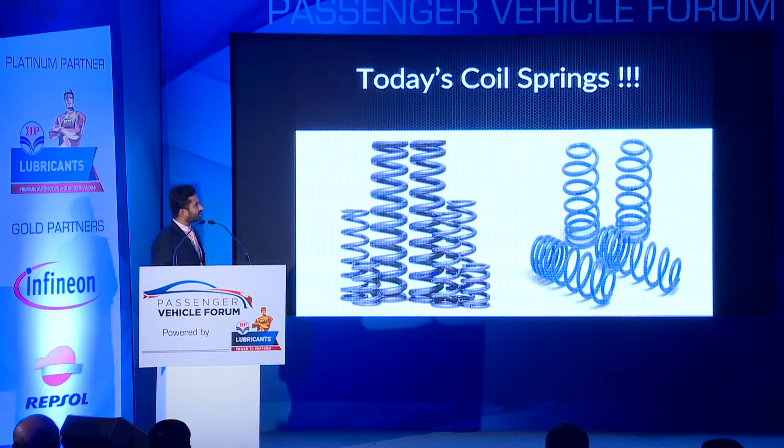Let's get some inspiration from BMW i3. Why exclusively BMW i3? This is the only model which is commercially available, and it has internal structure and body made with carbon fiber reinforced composite polymers. We should learn from this technology - how this material, CFRP and GFRP, can be used commercially for each and every vehicle, not only for electric vehicles, but for all passenger vehicles.

So these are today's suspension coil springs that are available in the industry and being used regularly with all the OEMs. These are made with steel. We have CFRP and GFRP springs as well. We have samples available here so that you can have a look and feel of this product.

The major benefit of using CFRP and GFRP springs is that it has a weight of only 1 kg on average compared to the normal steel spring coil that we use, which is approximately 5 to 7 kgs each. So if we are using CFRP, that is carbon fiber reinforced polymer composite, it has a weight of 0.88 kgs each spring compared to 7 kgs or 5 kgs of the steel spring. And if you are using GFRP, glass fiber reinforced polymer composite, for the same spring application, that is 1.1 kgs each. So we are getting a weight reduction of more than 74% in each spring.

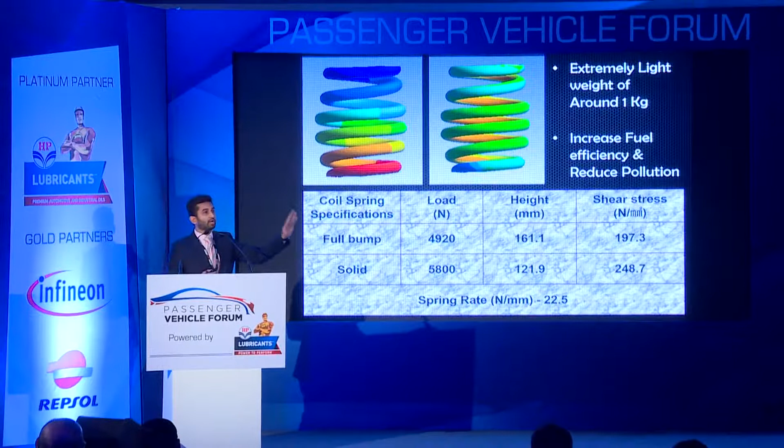These springs are being tested with the number of cycles compared to steel springs, and yes, it has performed 24% better than the steel springs. They have a full bump load of 4920 Newton at full bump, with a shear stress of 197.3 Newton per millimeter square.

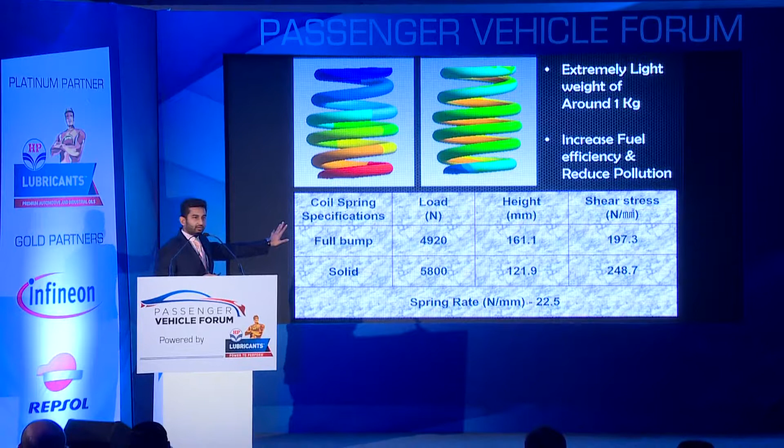I will not go into the technical details right now. This is the data which is available with us, and I can share more when we are offline. These are the different types of tests done on the springs: spring constant, creep test, fatigue cycle test, fatigue creep test, simulator, and weight measurement.

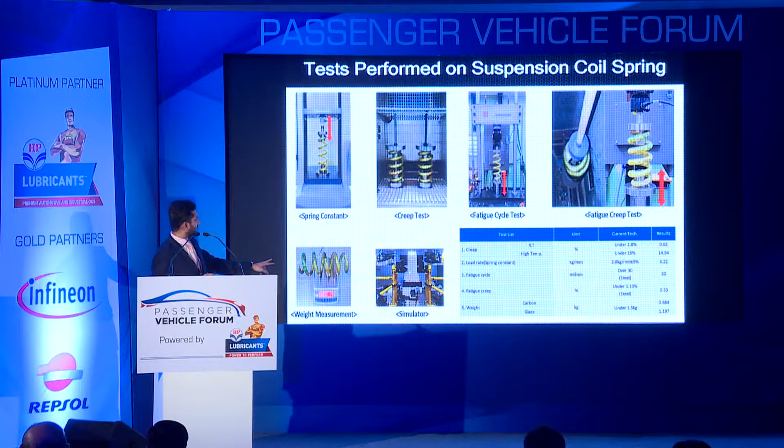We do not call it old technology now, but these leaf springs are also available in CFRP and GFRP.

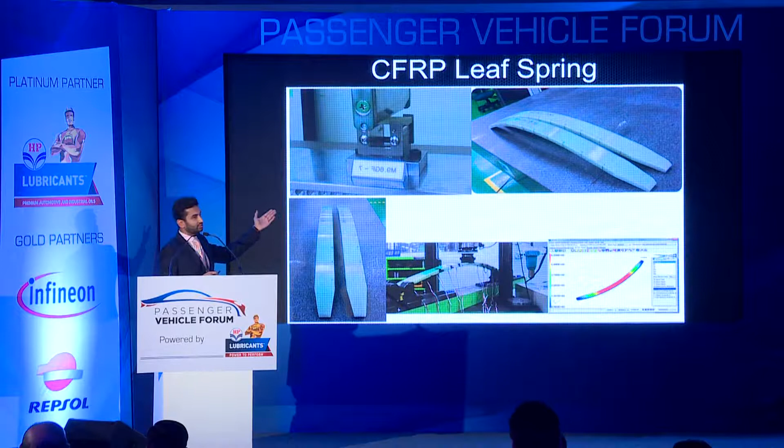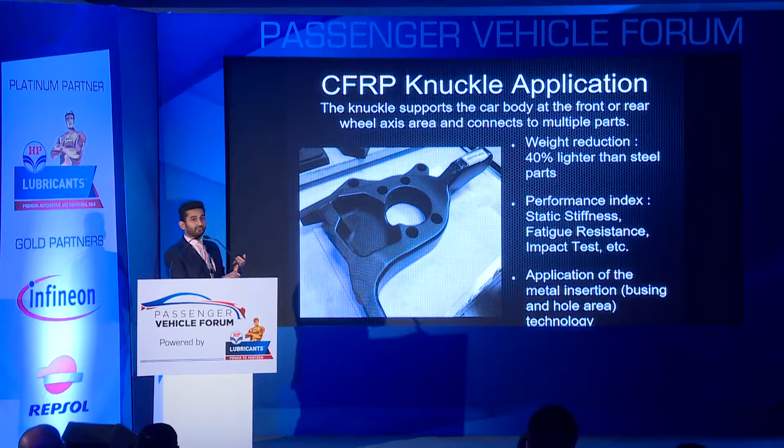Another application is the knuckle application. This supports the car body at the front or rear wheel axis and connects to multiple parts. This part also has a weight reduction of 40%, and the performance index includes static stiffness, fatigue resistance, and impact test.

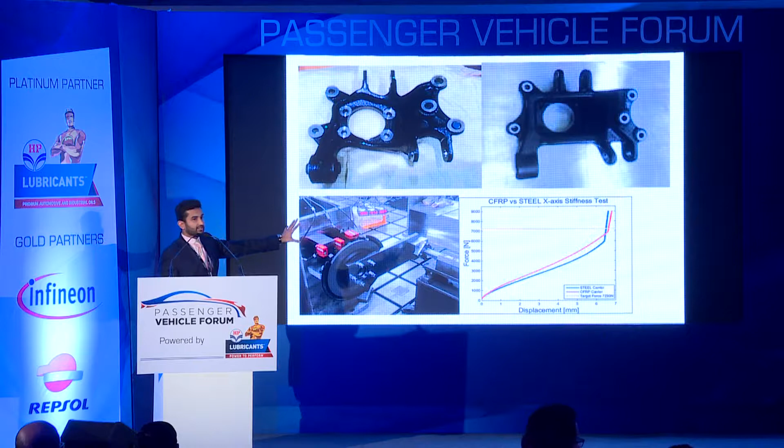Moving to this application, there is a comparison of CFRP versus steel. On the stiffness test, we can see the performance is almost equal, in fact better. These are some photographs of the same application, also known as carrier and knuckle.

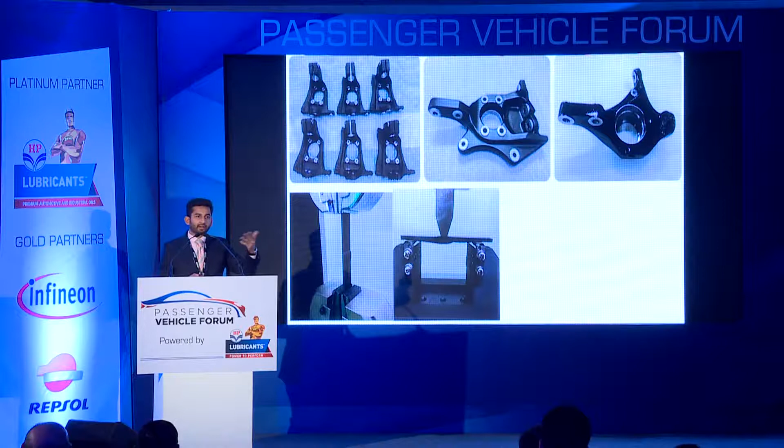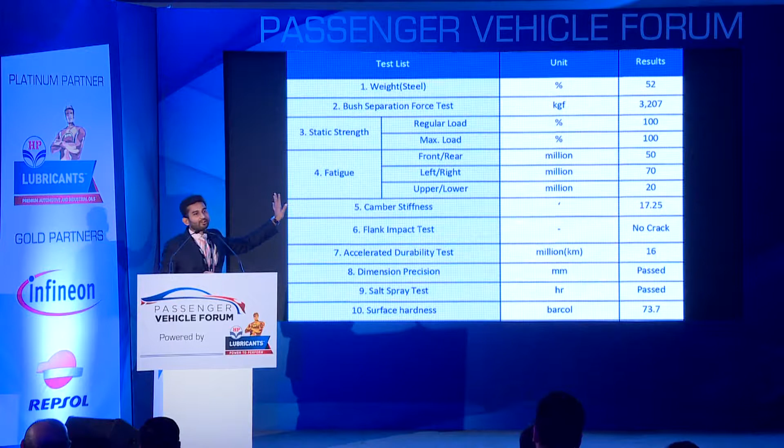So these are again the results that we have achieved. I don't want to go through each and every test and result, because I know we have passed all the tests compared to the steel application. So these are again the tests for that.

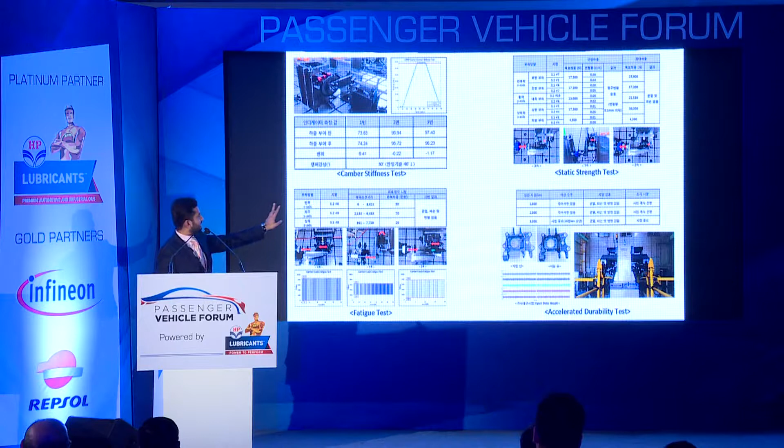That is camber stiffness test, static strength test, accelerated durability test, fatigue test. These are the tests mentioned here, but there are much more tests already done, and this product has passed those tests.

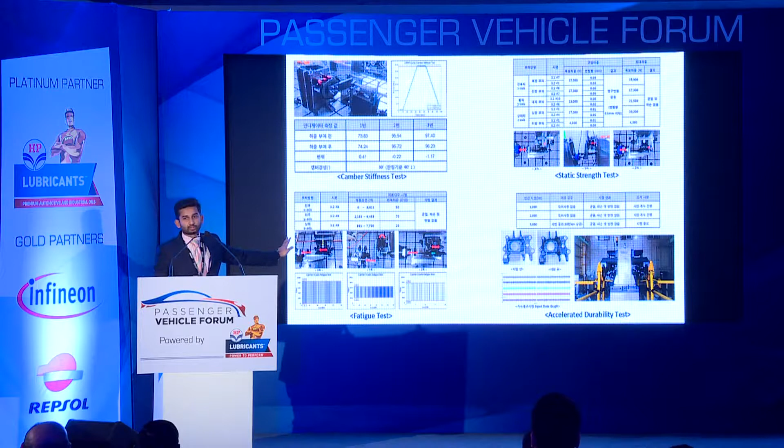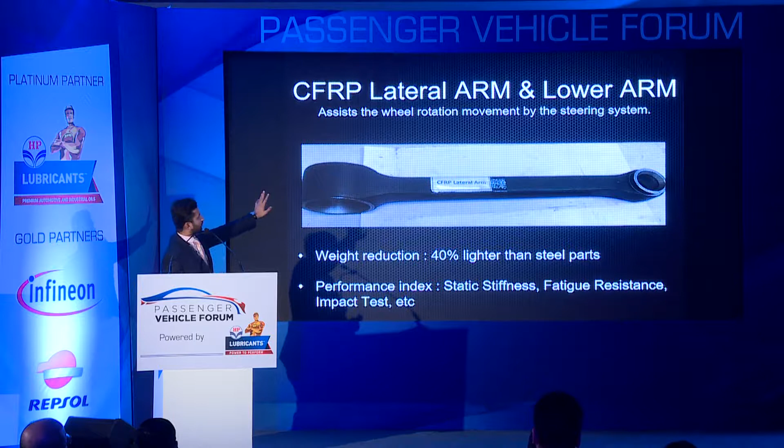This is another lateral arm and lower arm. We have both samples available here also. These are applications to assist the wheel rotation movement by the steering systems. I don't need to repeat the same advantage of weight reduction and better strength compared to steel application. These are again a few photographs of the application.

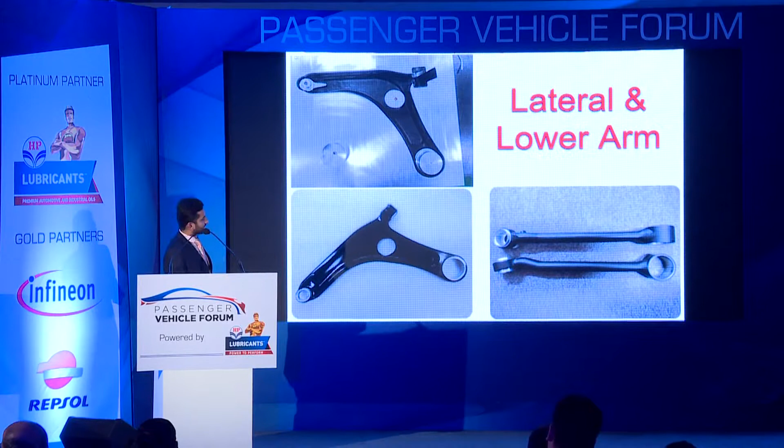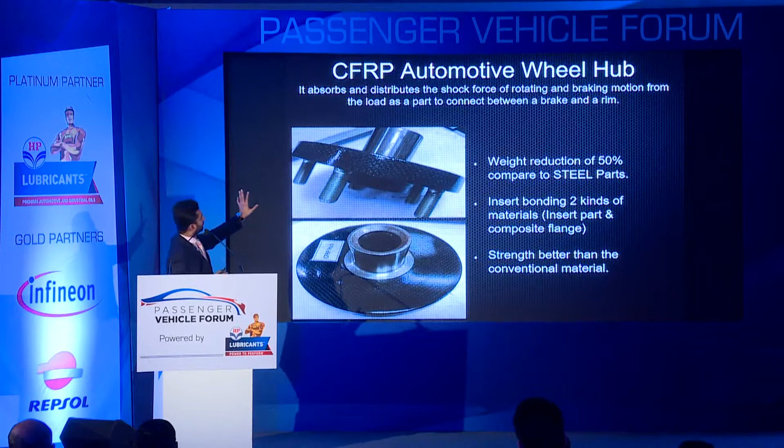CFRP automotive wheel hub. We all know this application is used right next to the wheel, which absorbs and distributes the shock force of rotating and braking motion from the load, as a part connecting between the brake and the rim. In the next step, we are also going to launch the entire rim in carbon fiber reinforced polymer.

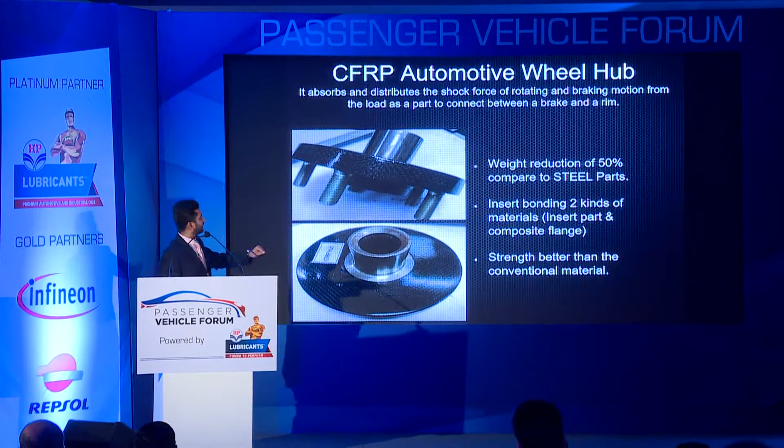These are again a number of tests that were performed on these products. Sidebars - we all know...

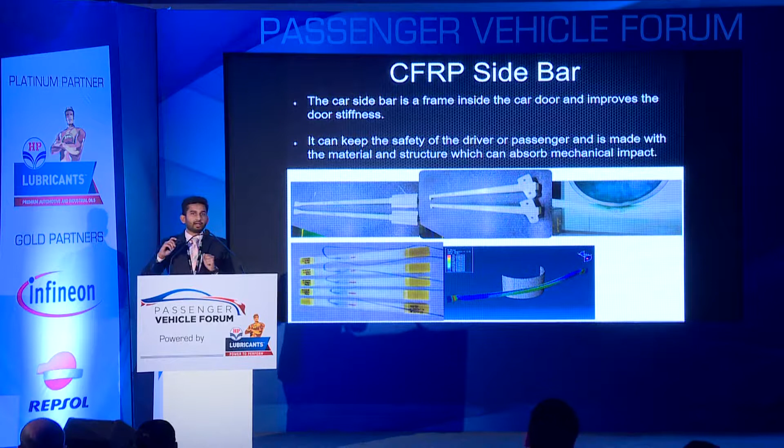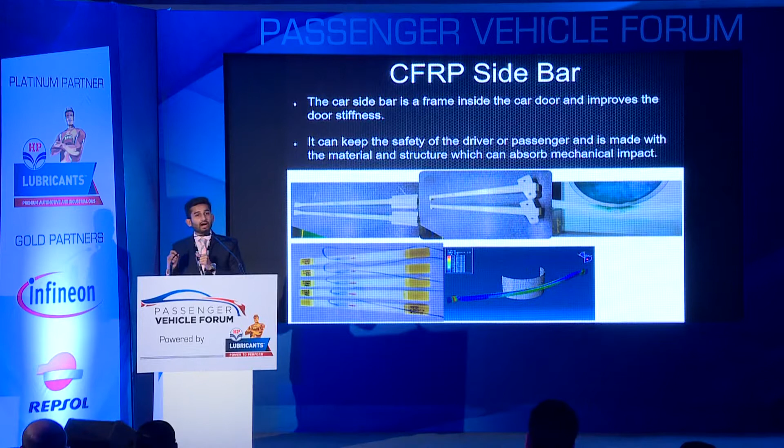Approximately 10 years ago, Opel used to market this particular feature as a strategy. They used to say that all the cars they make are most solid, with sidebars made up of entire solid steel bar, which will protect you from accidents in any case, any situation.

They are installed in the front of the vehicle, the back of the vehicle, even the right and left doors of the vehicles. So this same application is being made in CFRP and GFRP, giving you lightweight and better strength compared to that.

When we talk about impact testing, when an accident takes place, the same performance is given by these lightweight materials. The stabilizer is used in balancing the left and right wheel movement of the outside wheel.

Yes, our company is into two verticals: one is civil engineering and the second is automotive. So I've already given a brief about...